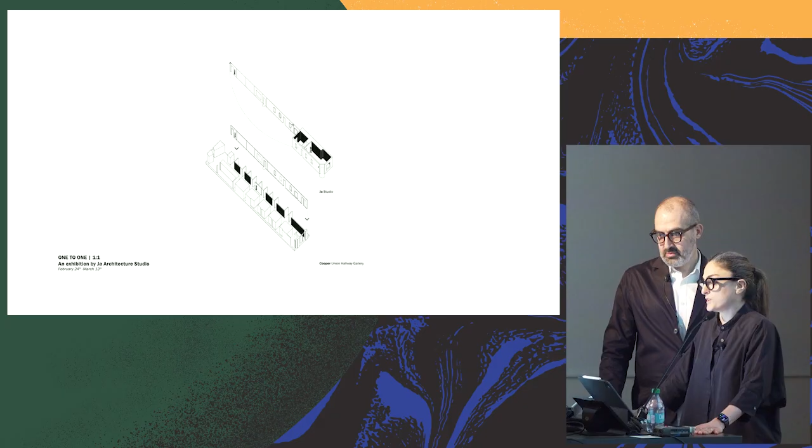Which is precisely why when the Cooper Union asked us to do an exhibition on the work of our practice in New York, we chose the space of our practice over the individual projects, and photographed the walls of our studio and overlaid them onto the walls of the corridor gallery there at the scale of 1:1. The exhibition was actually called 1:1 because we figured that the unrolled surfaces of our practice is exactly the same size as the gallery space at the Cooper Union.

One space in Toronto, Canada, the other at Cooper's Foundation Building in New York, which has a rich history. We placed 1:1 images on the walls, and then we brought in some of the objects from our office. Here you see the sawhorse that we designed, a construction drawing set, and a concrete piece that we designed for the Venice Biennale, all placed on the image as a scaled reference.

These transpositions happened on every surface of the space. In its best moments, there were conflations of not just the design objects and their images, but the adjacencies of everyday objects - like the fire alarm of one school and the thermostat of the other - which brought the day-to-day rituals of an architecture school and that of an architectural practice into a one-to-one relationship. And of course, windows and views and depth added an interesting dimension to the exhibition.

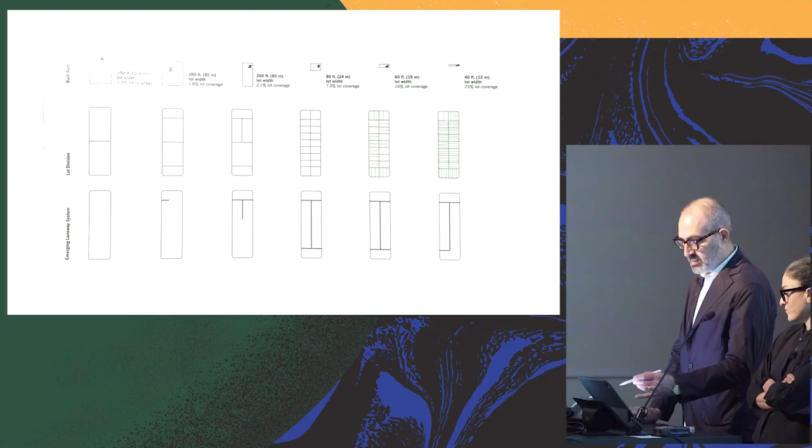The urban line is present in the city, and if you need to know one thing about Toronto, it's a very binary built form—either extremely low-rise or high-rise. That cap on height in the low-rise neighborhoods creates a very clear orientation of the blocks. You can see how successive subdivision has created a clear grain onto the context, with narrow and deep lots generated by that subdivision of elongated blocks in the city, coming from that cap.

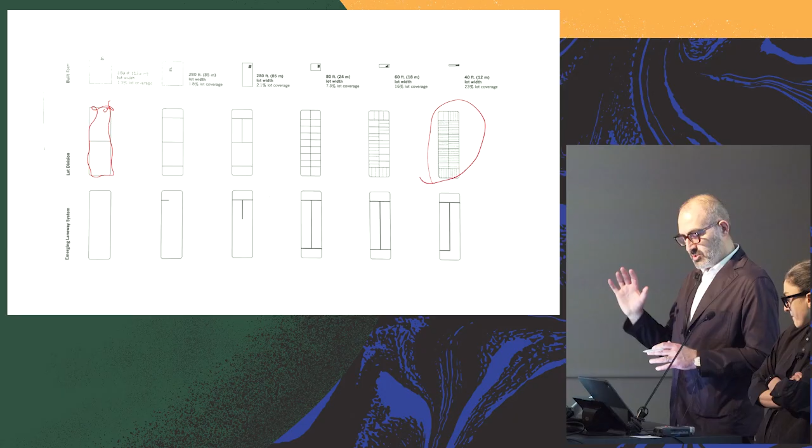Any residential project in the city deals with that condition. There's something beautiful about generic conditions in the city that keep repeating, and all projects deal with that—that's the lines of urbanism. There's also the anomalous relationship of the service roads or laneways—sometimes it's a T, sometimes an I—and all of those create unique conditions within a generic block. So within those two things, most of our work operates.

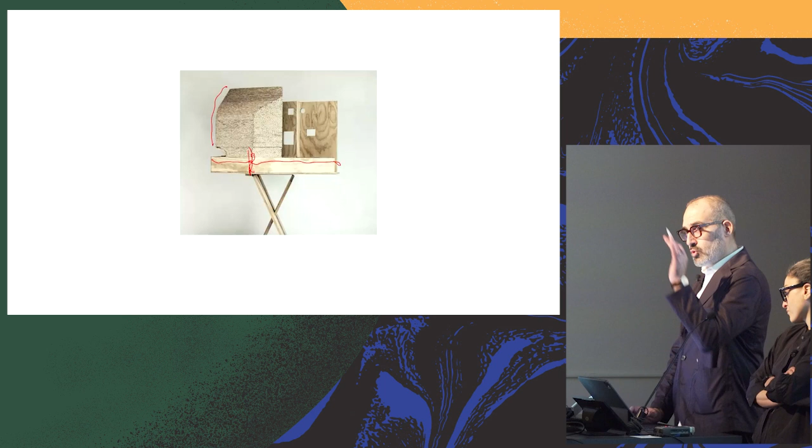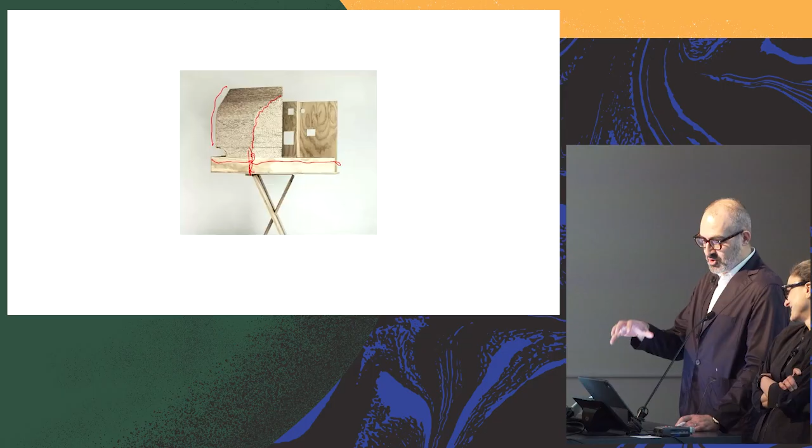If you think about the kink on the property line, which happens exactly at this moment, and the scooping of light, which is the generator of the section, you get this elegant intersecting line. We try to not only find that in geometry—and I'll explain when we get there—but to use it as a starting point that architecture deals with, getting more and more out of that kind of delicate relationship.

I would go through a few projects very quickly. This project is in the neighborhood.

This is our office, and this is the project that is right behind a commercial row, and there's a laneway there. It's a condition of a laneway and a series of turrets that we found on the corner of some of the Victorian houses, and we took the edge and connected it to one of those and put it in the back.

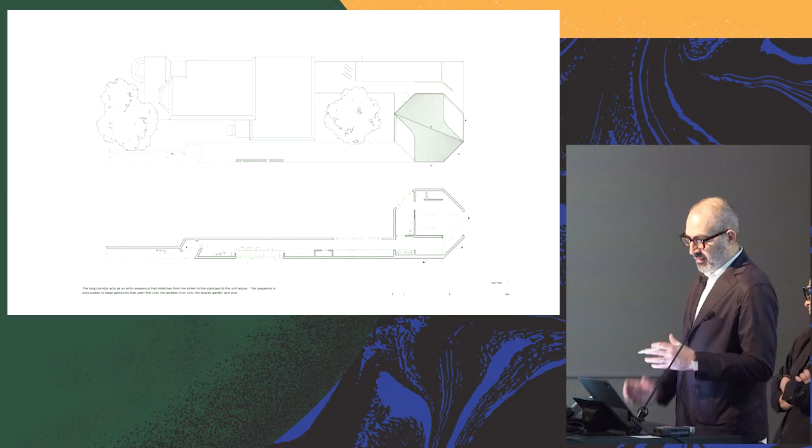So that typological element comes from this side, and then we tried to understand the house as a path. We thought it's an interesting theme, but also how you can fold that within it. There's something interesting about a set of stairs that does that, but also how you can inflate the property wall and produce a kind of thickness that is occupiable.

There is something about the laneways and the quality they have that belongs to the servicing side of things. And then your architecture finds itself at the end of it, including the edge.

That's the kinked property line, and that's a side addition. Let me look at it bigger. That's a side addition where we try to find a kind of tangential relationship, but still a threshold to go over and also pass under. So there's a crisscross that you don't expect to happen at the moment of the addition.

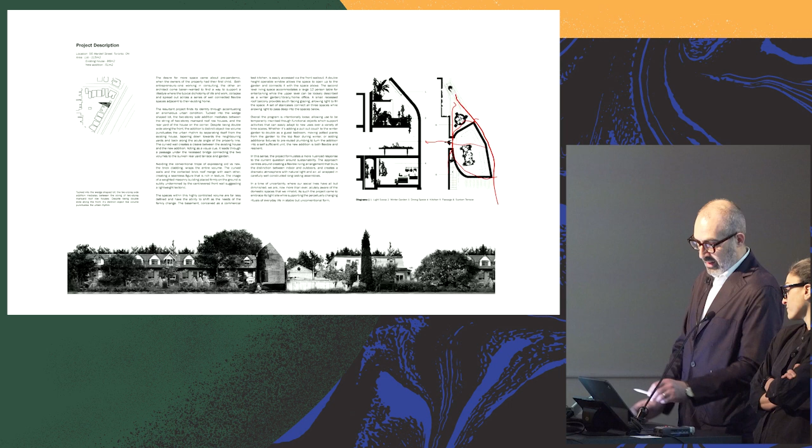At the same time, the side yard is a function of that moment in the urbanism of the lot division. We try to create an architectural promenade that goes under, gets here, and then takes this, and along that stair, it goes up. This is the front, as you can see, that's the passage, and that's the edge that I already showed.

In this view, you can see the whole thing happening. Within such a small footprint, you have the transition from the main building to that. You have the underside that you can come directly to the backyard, but at the same time, you see the presence of the stair that goes up at the edge.

Exactly at that kinked moment, it becomes a landing and it goes up to the point, basically to capture light, which is the bedroom on top, and that's the front.

This is a kind of multi-unit version of, not the same, but a different project, but you can see that theme happening. These were a series of units that we wanted to stack.

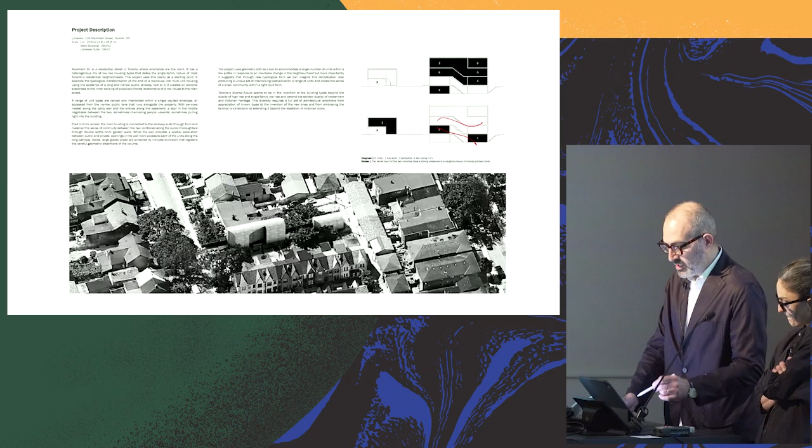We used the laneway on the edge, and we used a kind of crisscross or scissor stair, not just for access, but also to turn the units into a kind of interlocking, scissoring units that have ventilation on both sides, but also they're almost like a version of a townhouse because they're accessed from grade.

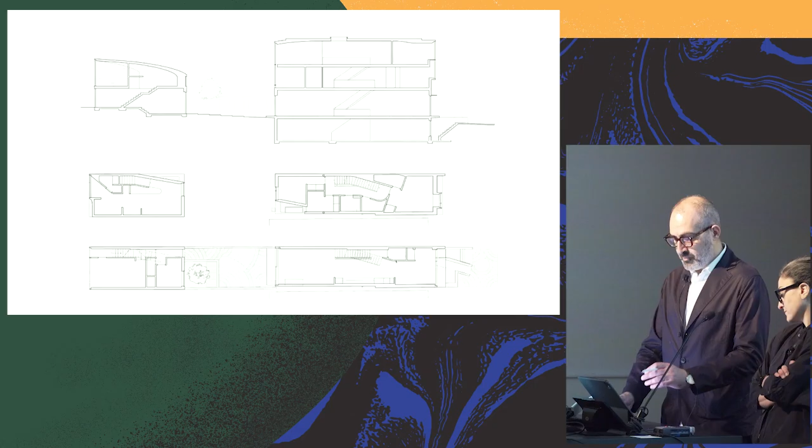This is a project that's more constrained. We try to create just a relationship between front and back through tilting or skewing the property lines, and create two geometric lines on the front that connect the side in the back and also the side of the ADU, the accessory dwelling unit.

That's the presence of it. These are extremely tight, packed projects in the city, and show how you can take an existing type. This next-door neighbor is also getting the type and doing their own thing, also referencing our project, but taking the type and transforming it through the means that are available.

You can see that oblique line registering the stair at the bottom. That's a threshold and the balcony it produces on the edge, and that line and its intersection becomes, on one side, the edge of the stair folding over itself, and sometimes it creates this kind of barrel vault with a fading line.

It's something. In the back, you can see again the presence of it becomes a full barrel vault, and also on the edge it's cut by the property line and produces a line. So that kind of relationship of registering a line, or doing something that has consequences in architecture across, is dealing with the existing type, which is of interest to us.

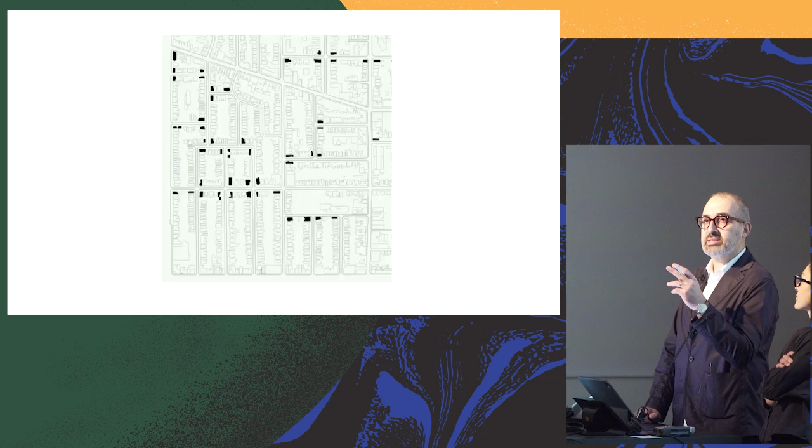Walking in the city, it's nice to see architecture in multiple episodes, and because we were doing these kind of small projects, we decided to basically commission all in one neighborhood, or most of the commissions we got started to be in one neighborhood, and the ones too far, we don't have a car. So it became a thing to just pick projects in our neighborhood, and we realized we can explore themes—every site is different, but you also have shared themes of interest that can go.

So this used to be a garage that we turned into a kind of bakery for an architecture graduate of our school, and these are the openings of the garage. Essentially, there is a barrel vault going inside that separates the front and back of the operative part of the bakery, and then we use the garage doors as an intersecting element for the front and back separation. So that is also very efficient. You enter from this side and you just go through, and you also see the operation in the back. This is the other view.

Another project that is a tight fit within an urban condition. It's an addition to the top, and this is a theme that keeps developing in our work—how can you maintain a kind of subtraction within the whole that sometimes acts as a patio like here, but gradually it becomes more and more charged with a threshold condition of inside and outside.

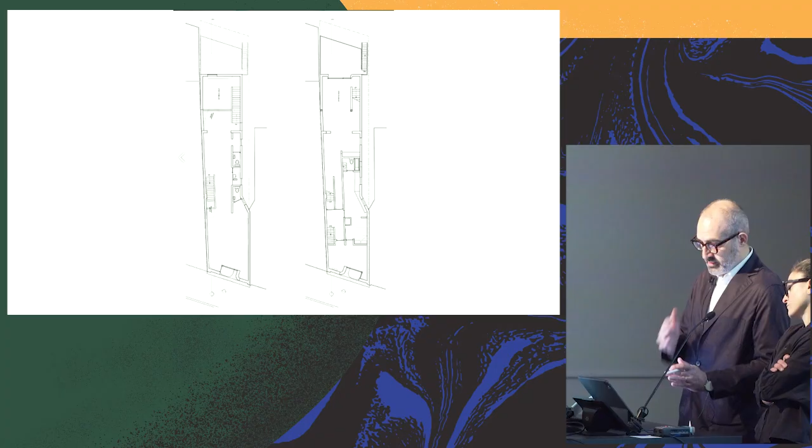This is a gallery on the ground, an artist residency on top, and a speakeasy in the back. So it's a packed, narrow project that has a very odd outline. This is a kind of old building, and as you can see, it's very deep and it's also skewed.

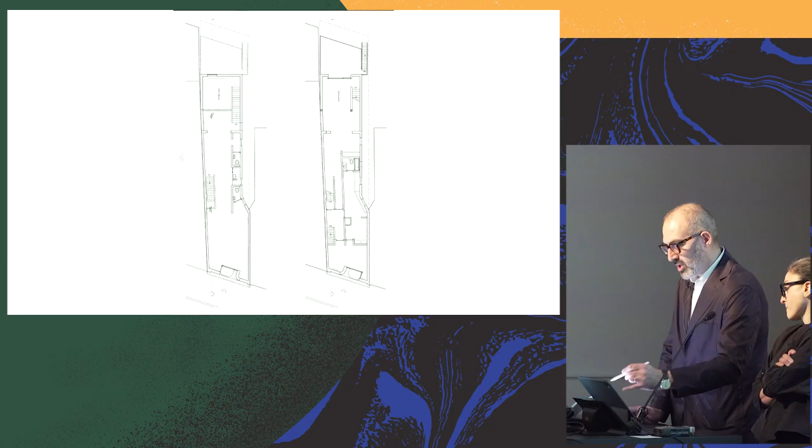So as part of bringing the lines of urbanism into the consciousness of the project—these are very simple, minimum-means projects—but when we get to the end, this is perpendicular to the street. So when you're on the street, you don't recognize the skew or the oblique of the project. We wanted to make sure that by the time you get to the end, you have that double consciousness of the relationship between the two lines.

So this is how you enter. You see the orientation of the skylight, and it's a big skylight for the size of the gallery that is in the back. And it also goes in—this is the second floor. You can access it from the third and the second, and you have that double height in the back.

This is a gallery and a hotel, again existing—this is a kind of retrofit, but we changed the front to create a subterranean condition right next to the sidewalk. We love the kind of urban threshold that has a subterranean relationship.

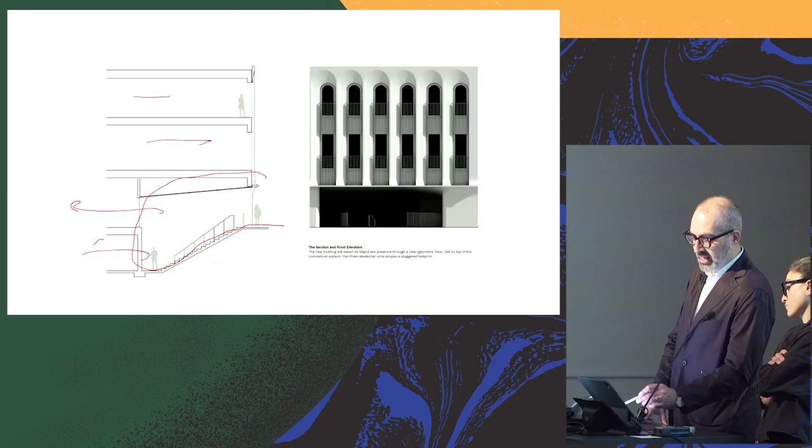It became a gallery here and a hotel on top, two gallery levels, and this is a kind of existing building where we changed completely the circulation, and we turned two nodes of access and service on the gallery side, with all of the subdivided small units on top.

This is that kind of glimpse of that threshold, and that's basically from the main level looking at how it goes down and up. It has a kind of cavernous quality.

The stairs change. Some of these projects we try to work with the constraints of a real project in the city. We also like the fact that we are building a lot in one neighborhood, and sometimes you have to basically like the idea of working with the constraints of how you build in the city and in the neighborhood.

This is the hotel level. This is the gallery level. It's just one giant space, and the curator of the gallery organized it as one series of one-shot spaces, and I think they did a great job.

And this is you. Okay, so...

Since the prompt is a line, in the same spirit as Nima, I will try to define line in landscape as a tool and a flexible threshold—a threshold that thickens and thins, disappears and reappears, that separates landscape from architecture, site from building, figure from ground, inside from out. I like this line by Diana Balmori a lot, because it is that line.

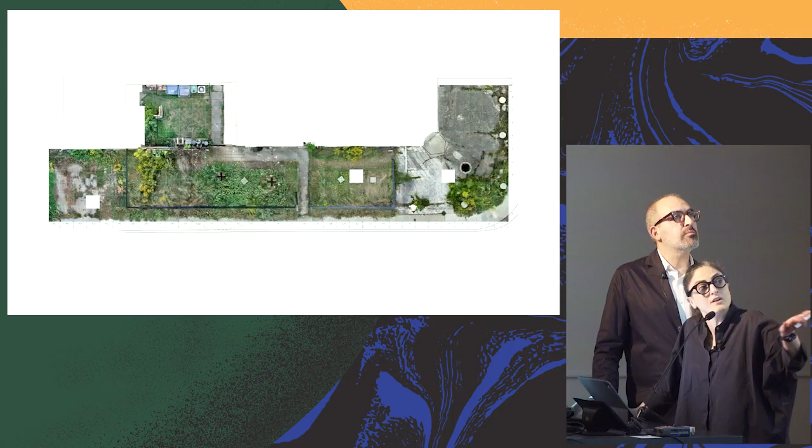Lines also represent thresholds or crossovers. Our office flankage yard is one such threshold. Flankage yards in Toronto are peculiar urban spaces protected by city bylaw and maintained by property owners, a vast number of interconnected yet fragmented network of ecology, where a change to the ecological makeup of one can impact that of an entire neighborhood.

And this doesn't look great, I know, but there is a method to our madness. We laid a grid system across our side yard using the quadrat technique to isolate standard units and study the number, type, and patterns of plant distribution across as a way of understanding its change over time, always preserving the plant and their chosen position with minor, mindful intervenings on our side.

300 squares were marked and systematically documented over the course of now 4 years. The species were collected, documented, and cataloged. These are mostly what we call spontaneous plants, and what our neighbors call weed. So our neighbors are not very happy with our little experiment here.

We study the temporal change and movement across our yard and its impact on the large and immediate neighborhood, which yielded an interesting shift in the ecological makeup of our surrounding, from manicured lawns to now mostly wild meadows, which, as we all know, encourages pollination and promotes biodiversity.

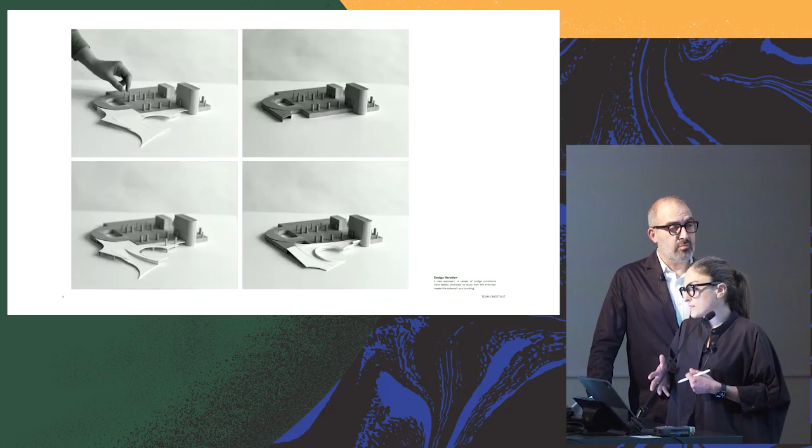The entrance of the building becomes the moment of convergence of different flows: flows of ecology, water, and wildlife below, and flows of human vehicles above, where a light tectonic bridge lifts and spans over a sculpted landscape, creating room for water and ecology below.

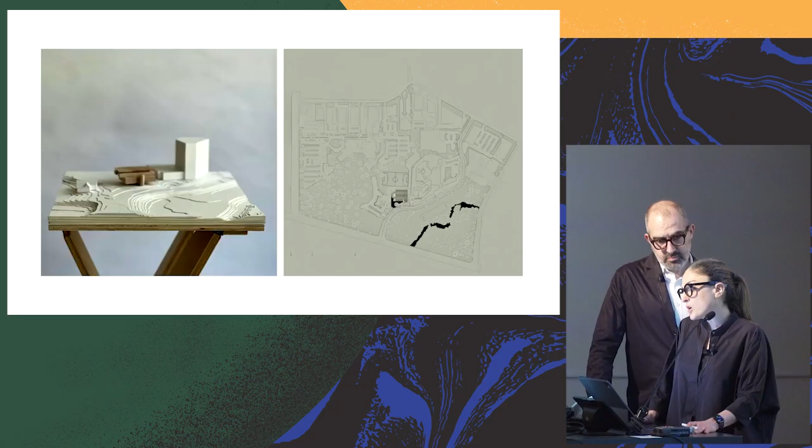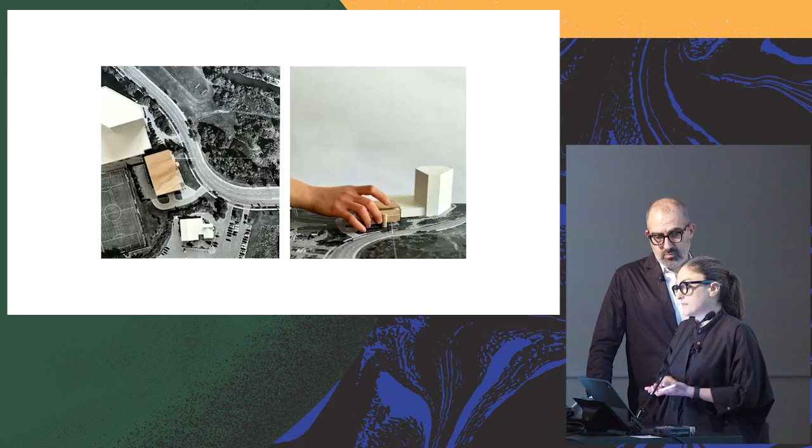The site is on part of Don's watershed. Don is one of Toronto's two ravine systems, Humber and Don, which bookend downtown Toronto. Here and here, this is Don, which makes our project similar to our Sard Yard—its importance is much bigger than its footprint, because what we do here will impact the ecological makeup of Don and vice versa. So the proximity to Don and the rich indigenous history of this land made it only fitting that the ground becomes the protagonist of our project.

The project began with the removal of the existing driveway, replacing it with a permeable and sculpted bridge that spans across the meadow and provides access to the building. These were some of the preliminary studies we did at this point, studying patterns of ecology, permeability and impermeability, mostly two-dimensional. Then we delaminated, or lifted, the bridge and the driveway, turning it into a bridge and starting to sculpt the ground, which gave the project a third dimension.

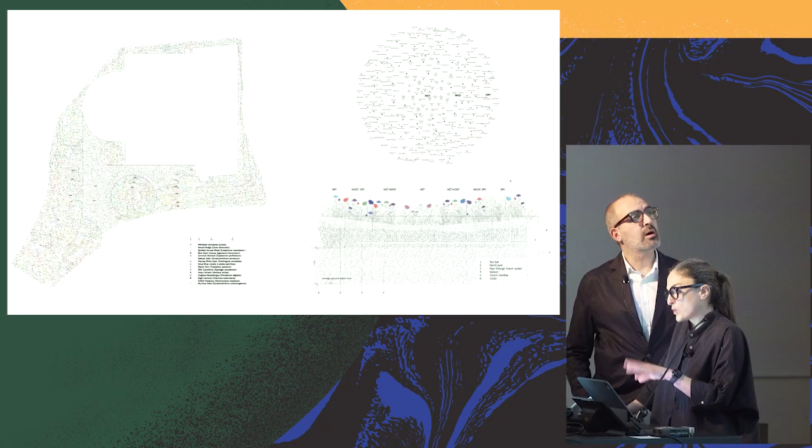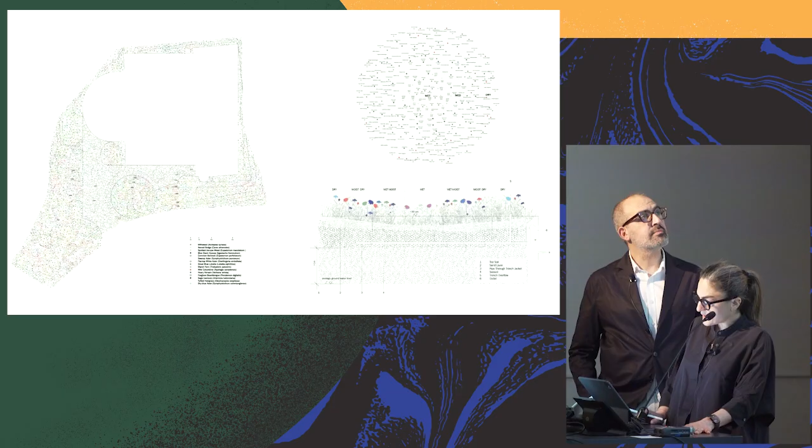The ground became a series of sculpted bioretention ponds, or cells, circular in plan and more organic in section, with accentuated ridges that offered a level of definition to the groundwork and also helped contain water on the site. Each pond had three distinct moisture levels: wet, medium, and dry. Each zone is planted with a combination of low-maintenance native perennials and grass, creating a wild meadow registered precisely to the anticipated degree of wetness of each bioretention cell.

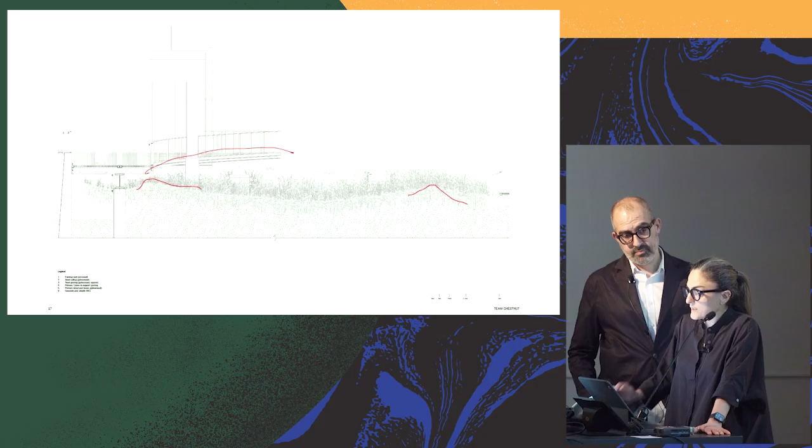The bridge subtly lifts and registers the pedestrian and vehicular access over this sculpted land. In this section, you can clearly see the geometry of one of the cells, with accentuated edges, and then the bridge hovering over the landscape. We draw the landscape with the same level of precision that we draw the bridge.

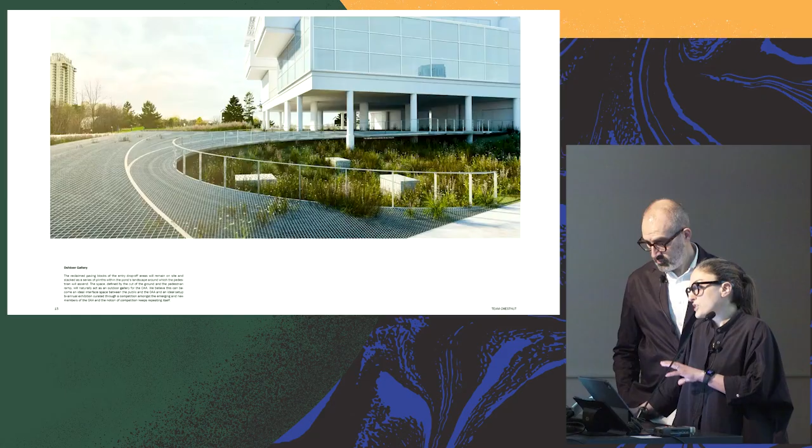This lift registers pedestrian access. We use grating as the material to reduce impermeability and allow light and water to go down below to the meadow, and its geometry and relationship to the ground leaves room for the meadow to grow beneath and sometimes protrude from between—which later on the client absolutely hated, for accessibility reasons.

Yes, so if the first part was about line, the second part I'll be talking about is party walls, or generally seams in architecture. Those of us who teach know there's a relationship between what we teach and the projects we do in our offices—sometimes after a while you find they feed both ways. It's never from one to the other.

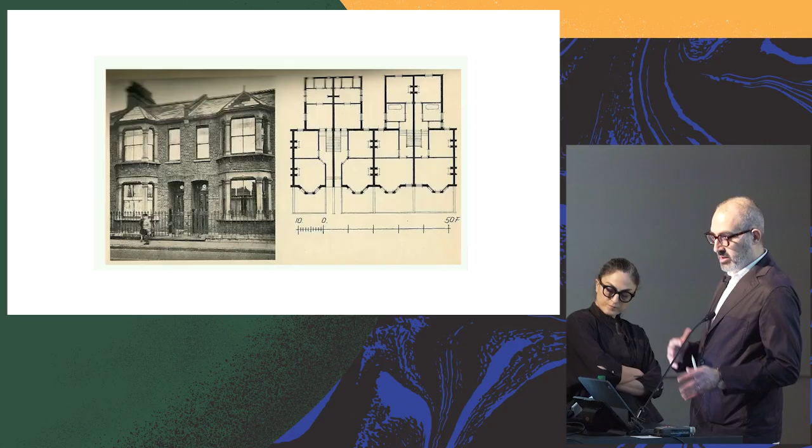The site of the project was in Toronto, but this is a London townhouse. You can see how an idea and a set of agreements goes from one context to another, and that's the history of typology—both charged and problematic, but also interesting. That is less about the authorship of a single project.

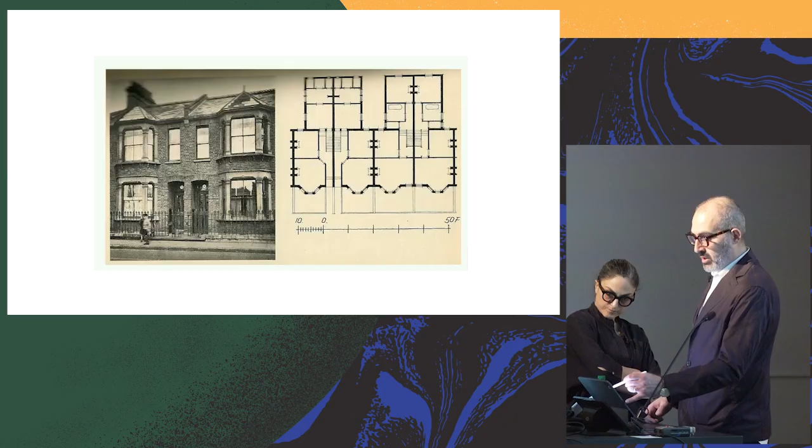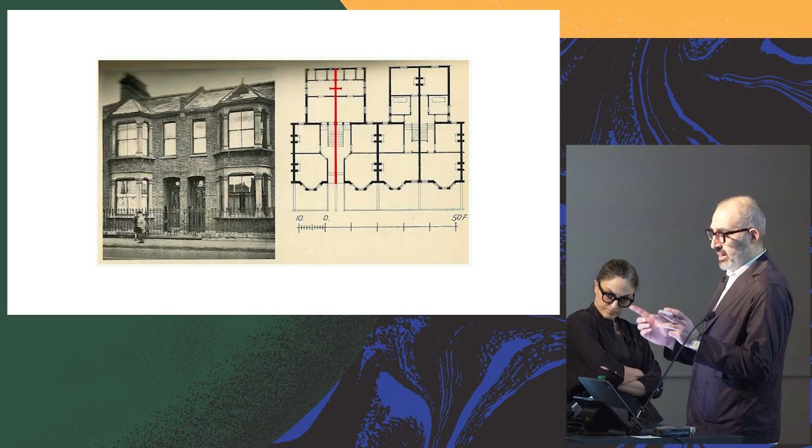And also in the simple act of just creating four rooms back to back and directly accessed from the street, that idea of packing is charged because each of the two adjacent houses share a party wall. A party wall is exactly on that moment of division of a lot, where two adjacent neighbors share a wall. They share the ownership, but the wall is also structurally dealing with both of the spanning of the two houses. So there is something charged and interesting about party walls.

The prompt of the studio was how to change the shared elements in a set of townhouses from an object to a space. So the idea was we gave a series of townhouses from different cities to the students and asked them to pick a room. It's a kind of warm-up exercise, but it became very productive in the whole housing project.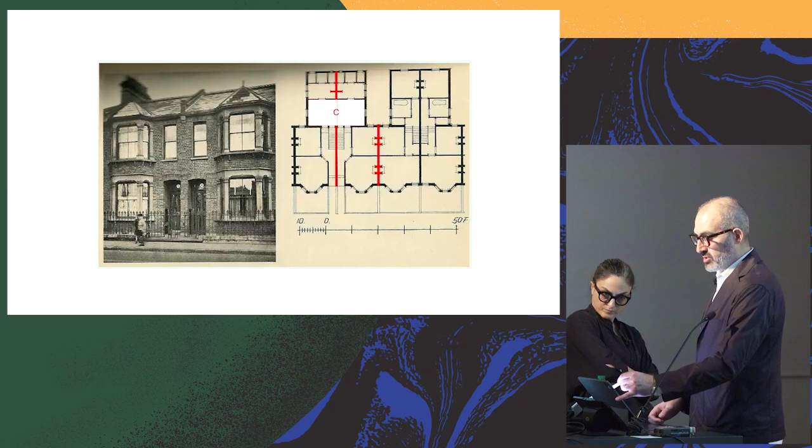You take two rooms, however you want to pick them. It can be side by side, and the moment you remove the party wall, there's a structural element of spanning, but there's also a shared new room condition that is produced. If it's at the end, there's a question of what happens to the original operation of the type, because you have to go through a shared space to get to the end of your unit.

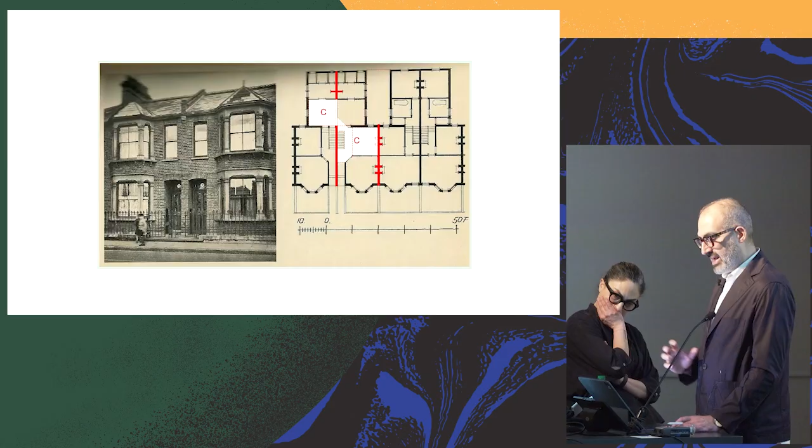The sequence, the relationship of that to the rituals of domesticity was interesting. If you pick the rooms, things become more complicated, or interestingly complicated, when for example you pick the rooms across the corridor and create the shared space. Then suddenly the symmetry is broken, and the stair has to also accommodate this new condition, this crisscross. So a lot of ingredients in architecture start to get implicated.

As part of this, this is something you may agree on: good assignments for studios are less about your own work. They have to be generic, meaningful and broad, and they're great if they're simple. So it starts simple, and gradually students would think about configurations within the adjacent houses, how a notion of sharing can be created within.

For GSD it was more about hybridizing the two. Think about this example I just picked out, the project on the right. It's by a London firm, Pike Al-Jawad, and it looks like a project that we could have done, or should have done. And I thought, okay, what would be the logic of creating a hybrid between the two?

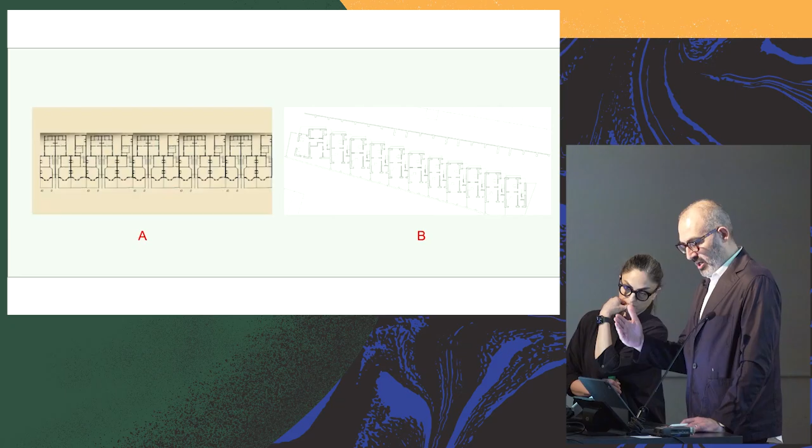This was just a diagram. A and B are two bars, but B has a kind of oblique aggregating logic present in the way things are staggered and aggregated. So how can you think about the scene now in this condition?

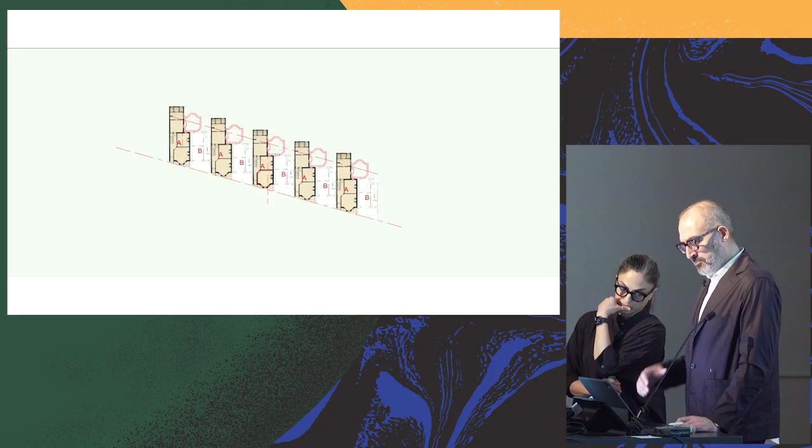If you alternate them and pair them, you create a whole. This time the whole has traits of both of these projects, and if you take the room of one and put it in the setback of the back, suddenly you have a notion of shared space created that is exchanged between the two, and it's more spatial. That's the starting exercise of the GSD studio, and it's about how we can share.

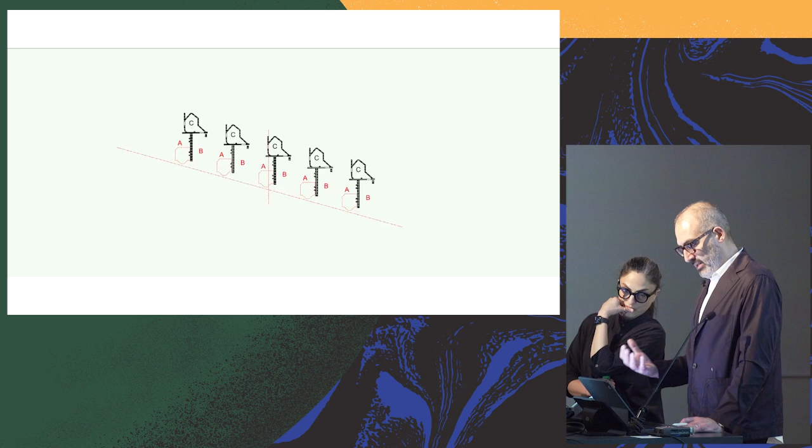I think that theme in housing is very profound and very important, but the technique of it is something that architecture can really get into—one of those themes we can dive into, learn more, and establish the nuances within that range.

I would go through one project of our office. We call it Parti Wall, but essentially it's a party wall between two adjacent row houses that share it, except the one in the middle is trapped in the middle. The one on the side has access to a laneway, or the presence of a laneway or service road on the side. The idea was pairing of two stairs.

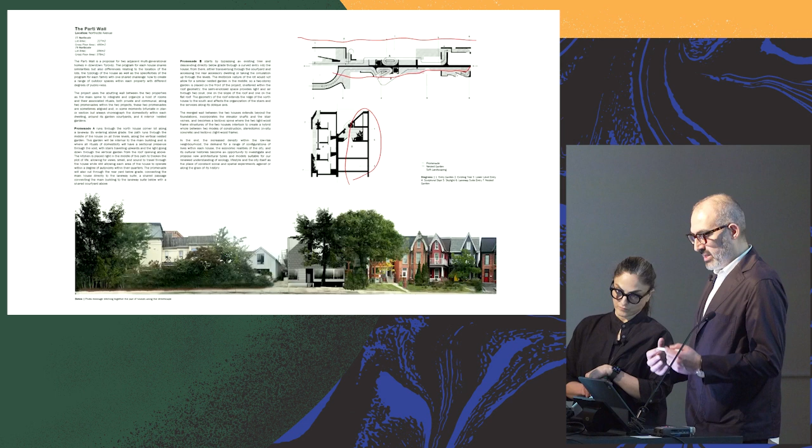These are the two stairs with two kinds of gardens that later on we talk about, a theme within the building. By the way, today the best moment was when Ashley took us to the end of the ramp and we saw the garden, and when you mentioned that it's a garden, not a green roof—that was the best moment.

So it's a theme that is becoming present in our work, and this was a pairing of a stair. But also, because it was a multi-generational house and the ADUs and laneways were already given, we thought it's good that for each building there's also a kind of nested outdoor space within the building. Except this one cannot have that kind of access to light, so that typological difference would push the garden to come to the front.

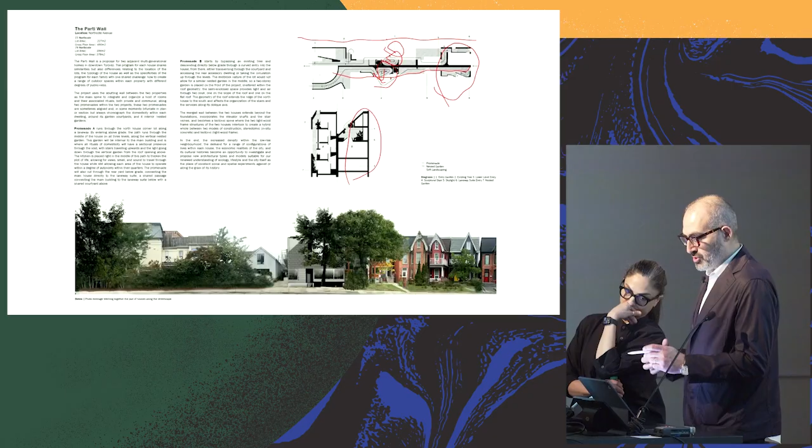So this is on the front for this house, and the other one is already in the middle. In section, this is the garden on the front, this is the garden in the middle—that's the condition I was trying to explain. This one is in the middle and has the access, this one uses the front. That's the elevation, and you can see the opening to that.

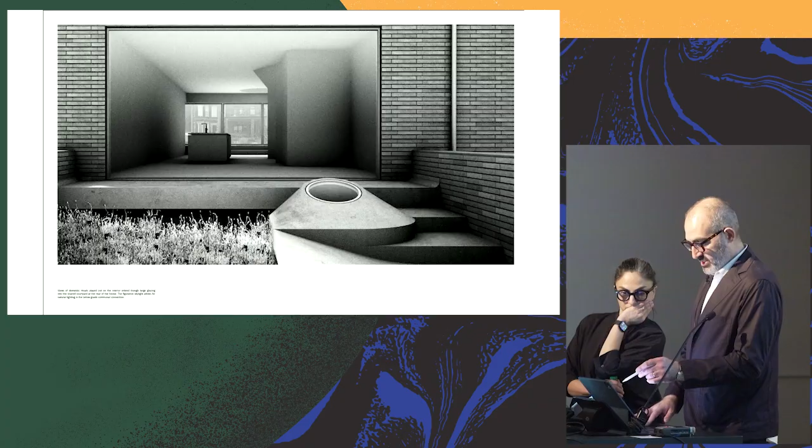It's a bit contained, so it's a condition of a double where the entries are also different. One goes to the bottom—there's a kind of threshold to the basement, so it's subterranean, with the living space above. The other goes directly to the living space. This was the condition of getting from the underground to the lane, to the ADU.

Half of it is built—this half is essentially this, and we're also finishing the interior. This is kind of fabricated outside, and we deal with one of the themes of building some of these projects: gradually you understand, appreciate, and learn more about the North American construction method, the light wood frame construction.

And this is that garden on the third level. There's a piece of plywood up there—when they remove it, it's going to be much more bright. It's a great moment for a garden that is nested within the shell.

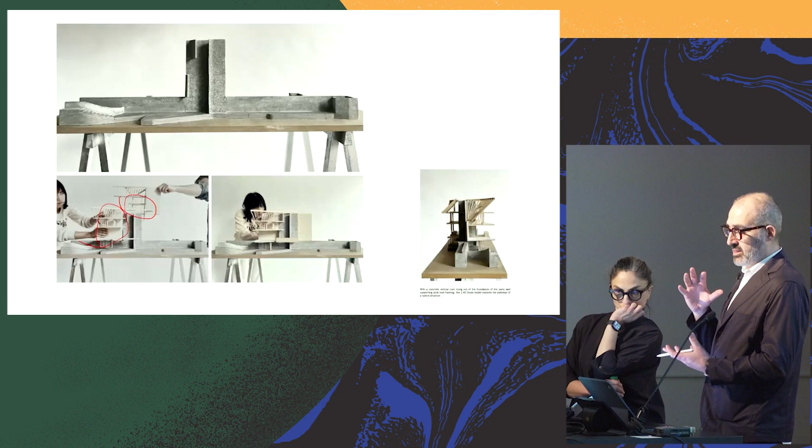The idea of tectonic, the kind of hybrid tectonic of two building systems, is very present even in the most normative houses in North America, because the ground is handled generally by foundation walls made of stereotomic systems—CMUs or concrete. We try to extend it within the core of the building upward and create more interlock. So the thing we've been doing in this project is think about the interlocking relationship between the wood components and the concrete.

That's a theme we've been getting more and more interested in. We had a proposal for Venice Biennale that was a finalist twice—it never got to the end, but it's again about the relationship between the heftiness of the ground and the lightness of the box above. We call it 'boring lightness' because it was boring in a sense, but also about the act of boring, or taking out a cylindrical extract of something.

And this is Behnaz showing—we built a few of them, at a 1/4 inch scale. And there was something about the lightness.

It's one of those things that when you come to North America, you start walking in buildings that slightly move, and that's an experience that's quite interesting. We think the lightness in North American architecture can become more expressive, more into the consciousness of the discipline. That was one theme.

But the funny thing is, as you go through mass timber now, you realize those kinds of relationships are still present in a lot of the buildings getting built in Europe. With mass timber, there are linear members, aggregations of linear members, and they still have that relationship between the stereotomic or concrete base—which also becomes the core—and the kind of basketry of wood that sits on top.

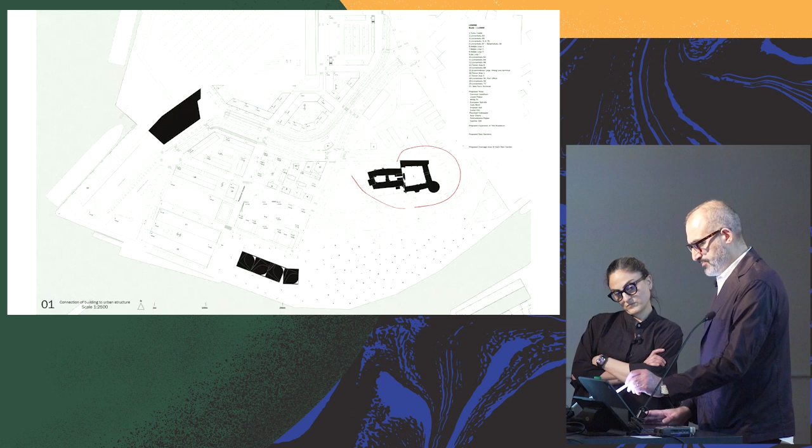It's in Turku, the second city in Finland, and we selected this because it goes back to the idea of a shared threshold and how aggregations can sometimes create a whole range of conditions through simple operations. We took the shed typology of what used to be an industrial port, and the site required us to address a few key buildings, one being Turku Castle. We took that typology, created one, then rotated and copied it, creating four different conditions.

This is a kind of coplanar moment between a roof surface that meets the complete planar moment—we registered that. As you can see, the rotation creates different conditions, but at the same time, on the other side, all of the clerestories—certain things in the act of rotation do not operate. So what remains constant and what remains rotated—thinking about simple operations with profound relationships or impact in architecture—is interesting.

We also try to create a kind of opening in the ground through the act of aggregation. Things can become structural, so you can have deep beams that are kind of structural and can sit on the ledge of a beam. And then you can clear the grounds from presence.

This is the ground that is occupied. There is also the presence of more and more we are trying to deal with a kind of ground that is extremely flush, and also deals with the question of water in the methods that Behnaz has already explained, and also becomes these kinds of moments of entry, with more public functions at grade.

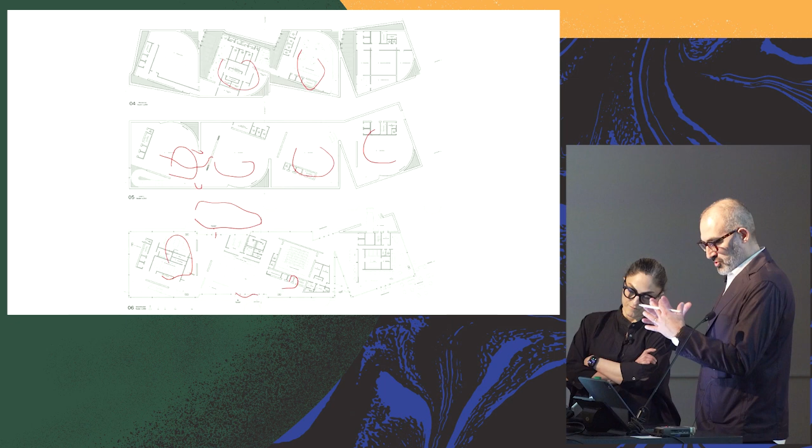But as you go to the top, you see the presence of galleries that are kind of contained, but at the same time you get these notions of seamless thresholds from one to the other, and the administrative part towards the end as the building kind of shrinks on the top. So the theme of type, the transformation of types, and the range of spaces you can produce was interesting.

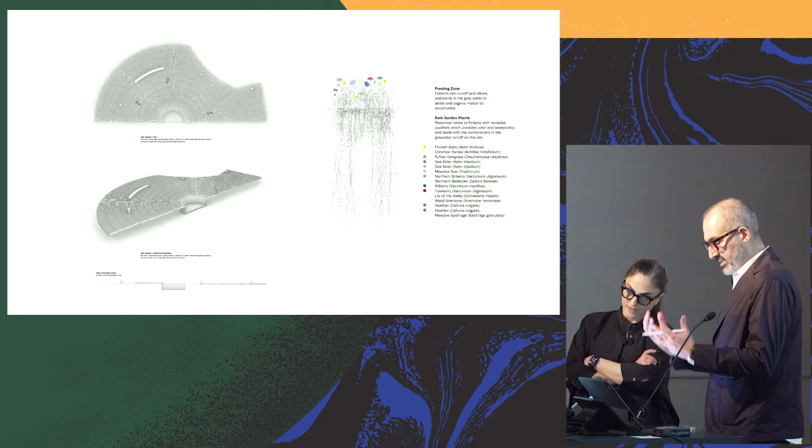And also the tectonic part that we are carrying forward that interest. This is the ground -- those are the retention ponds that Behnaz mentioned, and how we're always trying to create a kind of seamless connection that you can walk, dealing with the problem of water that is right on that edge.

So that kind of continuity at grade, the presence of the building, and also the conditions of all of these four seams -- it has some of the themes about the core qualities of that first object that I showed you.

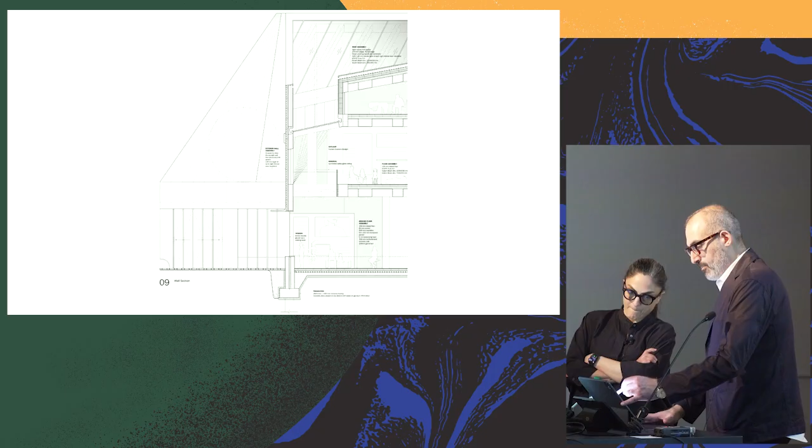The section shows, even within the section, how you can capture light for the side that goes to the front, and how you can have 1.5 stories with the galleries looking down, and also the attic space that would be allocated to more of the kind of administrative elements.

This is another kind of aggregation -- a project for Bauhaus. It was a 2-stage competition, 800 entries in the first round. In the second round, we got the 4th prize. We still like it because, again, some of those themes are present here.

I would say this is a building on the park, and it's also interesting -- the fact that Gropius's Bauhaus is in Dessau, and this building is also in Dessau. But the site of the competition is not within the school campus; it's actually in the city.

There is something about the role of how projects now more and more are looking towards the historic part of the city as the hub.

So even in the south, the museum is actually next to some of these older buildings, and we wanted to have a nod to both of them.

So the logic of the project is the kind of pinwheeling -- if you know the famous plan of Bauhaus, but it's kind of a 6 reciprocal pinwheeling that is happening. But the moments create one big room on the top that can be curated.

There's also these qualities that we like -- again, the double read or the ambiguous relationship. You would read this wall as the end of one, but at the same time, when you come to this seam, it belongs to the volume below. So there is a kind of overlap between the two, and it also becomes moments of entry and threshold.

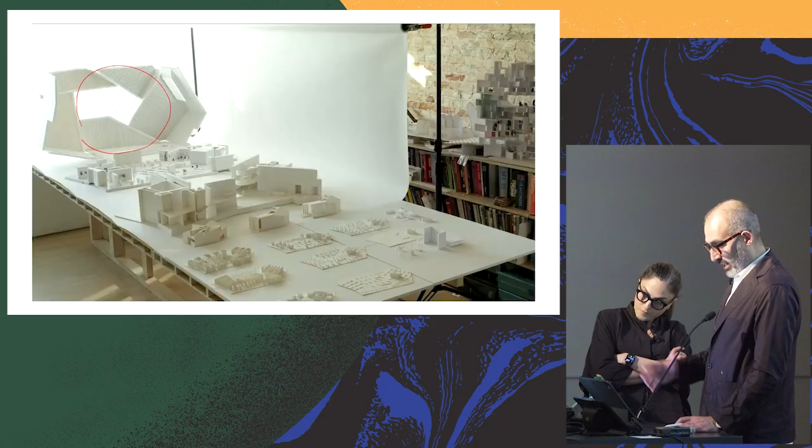And that is present -- this is the reciprocal beams that you can see. We built a lot of these models and were going full on for the thing. We got the 4th prize, but we love that table.

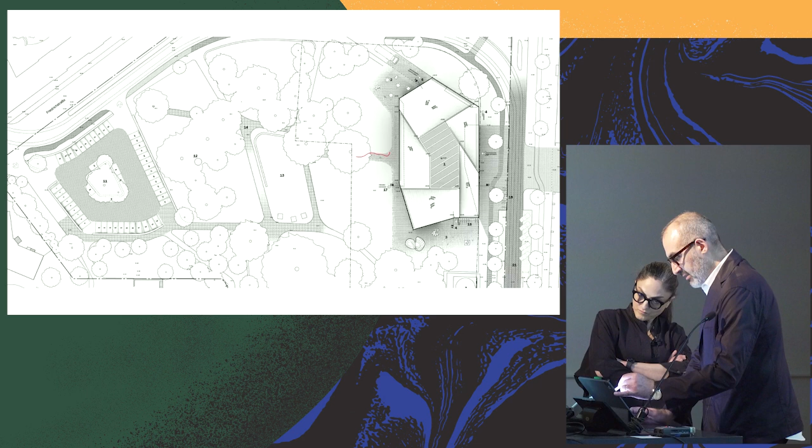This is the plan. You would see, again, those kinds of shared walls between the aggregation, and also the gap that I explained in the volume that registers essentially becomes critical moments for capturing light, but also passage. And again, Behnaz creating the kind of lovely relationship between the building and the landscape.

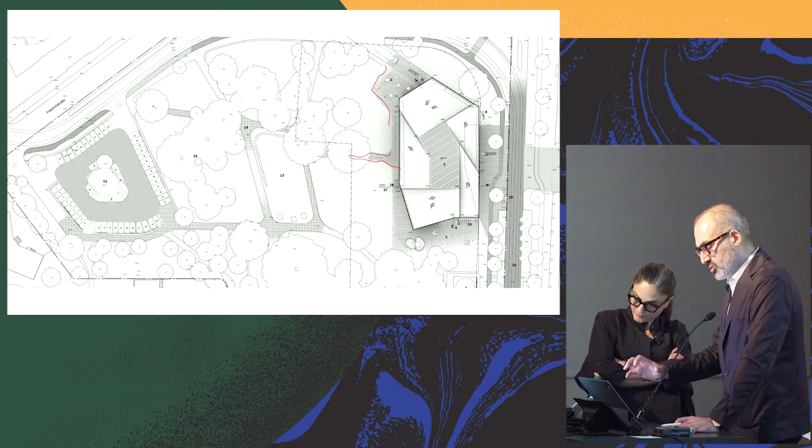That's the room that we created on top as one big space that is articulated spatially, but at the same time allows for larger curations. This is another project in Tartu.

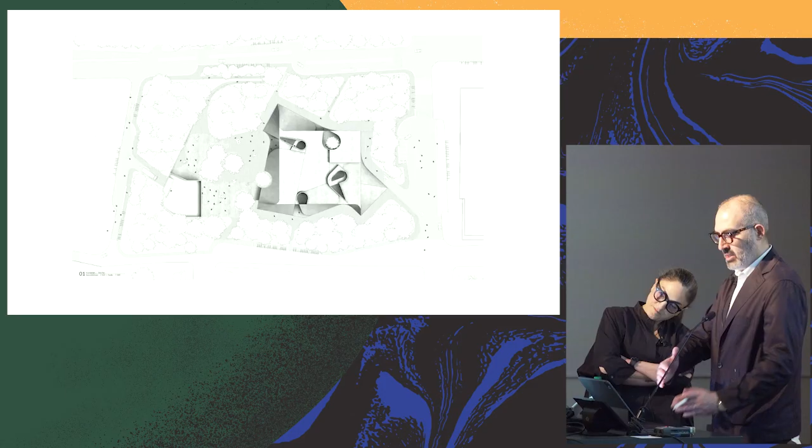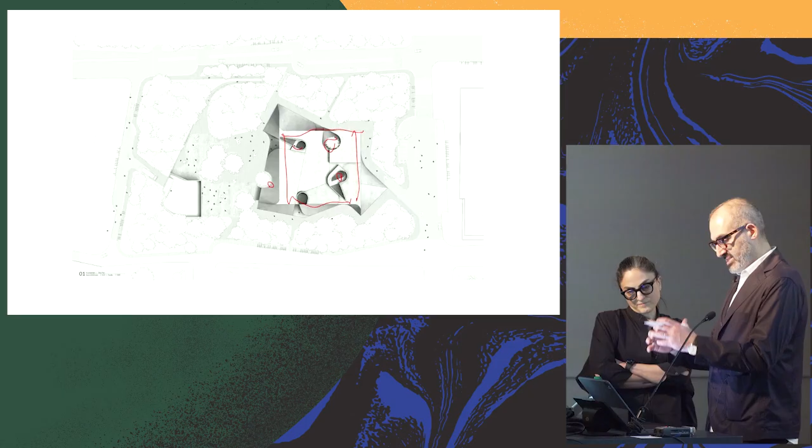This didn't win anything, but it was the idea of again thinking about mass timber coming from our learning in North American construction methods. The idea here is more about how you can think about rotating elements out from a pure rigid rectangle or square in the middle. That allows strategically for the placement of some existing trees to the side, but at the same time creates an overlap that becomes points of entry and essentially voids. So how can you think about the rotated overlap as a void? That can become a kind of rain garden.

It can also preserve certain moments - we strategically picked those to relate to some of the trees remaining in the middle of the park, but also tried to overlay it with both entry and circulation.

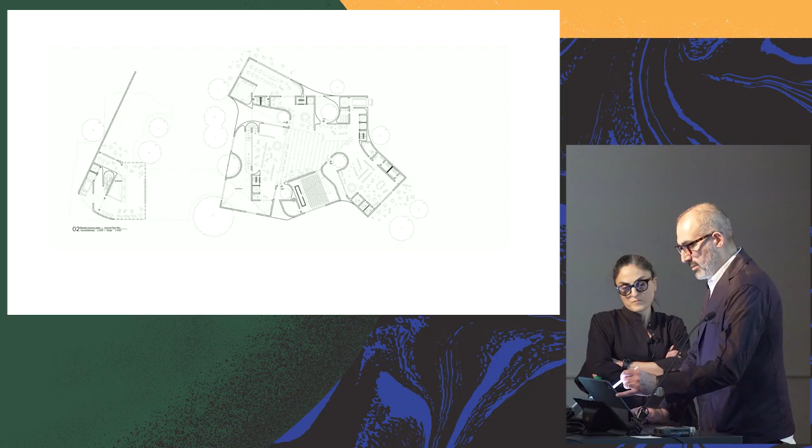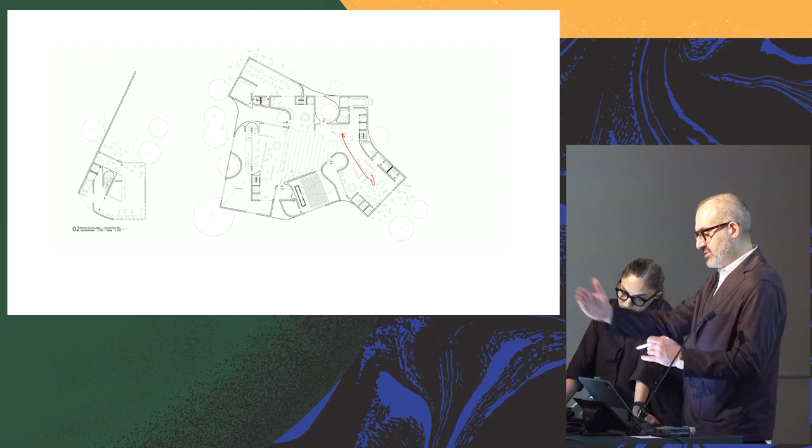Maybe that's why there were too many things happening on the same note. But also there's a relationship of reading and not reading the purity of the square - the threshold, the transition from one space to another, and the definition of a room. You don't know if you're dealing with one large collective space or a series of connected but slightly more defined and separated spaces. Those are the kinds of spaces, and that's the project on the ground.

It was a very massive program, and we had to connect a performance hall, or a small performance hall, from the base to the museum and the library, and also the parking structure on the side.

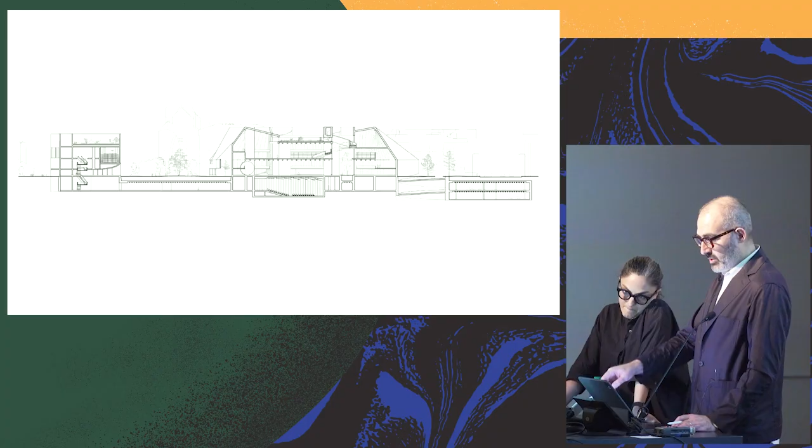This is the project in context. We really worked to create a big building that sits on the site almost effortlessly, with these points of entry. And that's the presence of the project onto the park.

We wanted to have connection to the park, but we wanted to make sure that the entries remain deep into those critical moments between the volumes. It's not an aggregation of just a series of volumes - when it gets to the center, it becomes one. So these are the kind of themes that we are interested in.

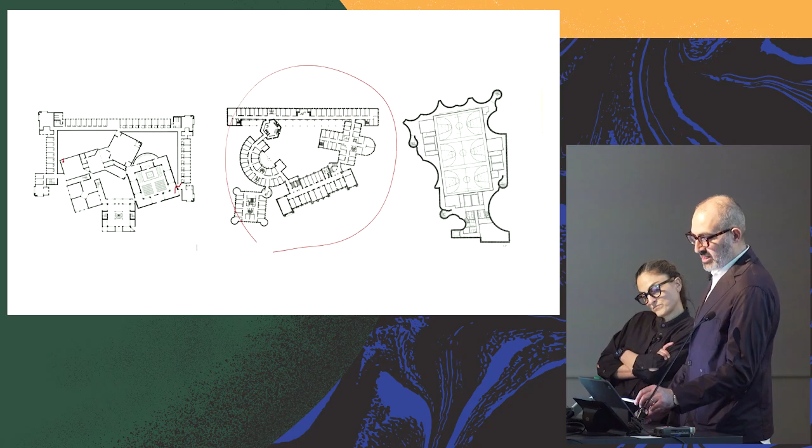We always look at precedents in history. If you think about the different versions of this act of aggregation, there's a level between the Stirling version and the Kahn version - I'm trying to remember, the mother house, what was Kahn's Dominican mother house. This famous Kahn project shows point connection and the framing in the back versus the legibility of typological elements being aggregated, still with point connection as a transition from one to the other.

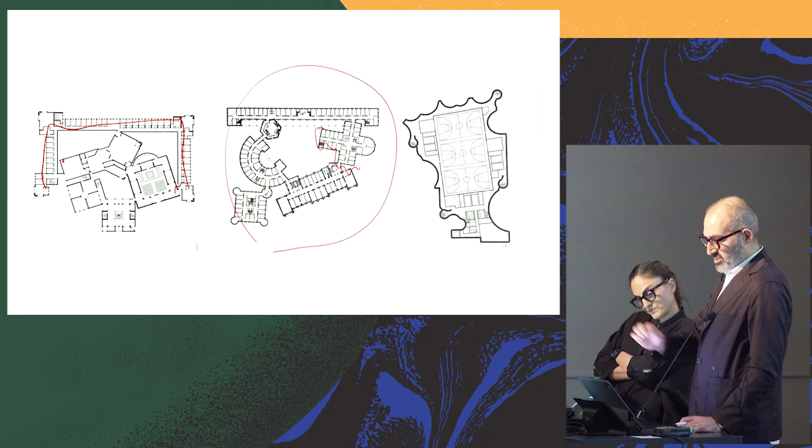Versus the Kerez project, a gymnasium that basically subtracted all of the tree roots and created one big space correlated on the edge. So we always relate our mode of work to some of those historical precedents to always situate ourselves.

And now that's your turn.

So yes, as you saw, particularly in the last one, we're kind of trying to move these thresholds inwards in the projects. And recently it's become more and more, I would say, where there's more interaction between the insulated and predictable built form and the unpredictable and messy ecological systems.

Which I guess began with a cross-disciplinary options studio I taught first at the University of Toronto, and now currently teach at Cooper Union, called Plant Diaspora, where the term diaspora, typically used for humans, refers to plants displaced or relocated from their original habitat. The studio was a way of exploring topics in architectural tectonics, ecology, climate change, immigration, displacement, and more, using greenhouses, or more specifically what we call Wardian rooms - a riff on the Wardian case, which was used to transport plants during colonial expansion, as a vehicle for our explorations.

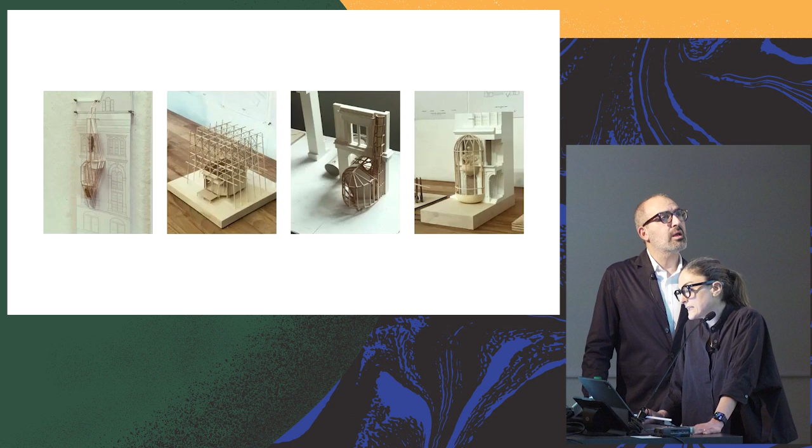These are some of the models that my students at Cooper built, resulting in spatial, tectonic, and climatically charged explorations at the size of a room, in both cases - Daniels and Cooper - in relation to the respective school. Here is One Spadina at Daniels, and this one is the Foundation Building at Cooper.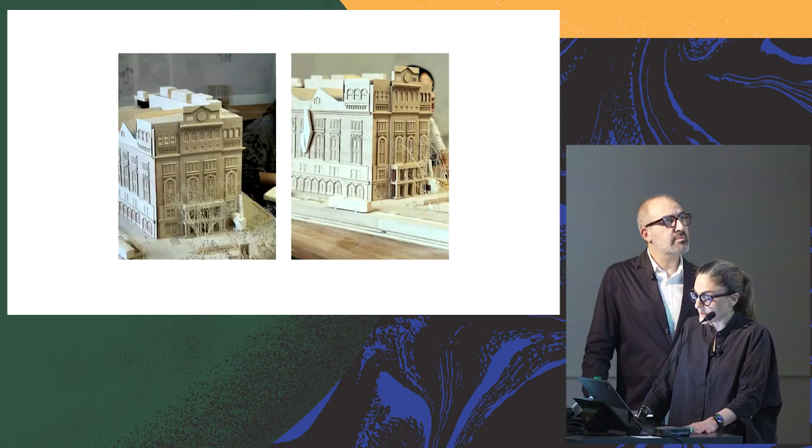These rooms are perfect crossovers between architecture and landscape, where as much emphasis has been placed on ecological precision as on tectonic resolution.

This was a contractable room for Siroma, an endangered plant from Korea, designed and assembled during the review. The design was a lean-to greenhouse taking cues from the neo-Gothic architecture of the school, both in overall geometry and functionality of details, such as the hinge, which through its expansion along that curved line and locking it in place creates potential for it to be transported as a narrower thing, and also expands for a human to crawl in and maintain the plants.

The play on that flexible threshold - and this is the last project we're going to show you, I promise - moving this line inward informed our most recent entry for a new Museum of Architecture and Design in Helsinki, Finland: The Light Stack. This is the same site as the Guggenheim Helsinki competition we entered way back, the largest international competition, with 1,700 entries. We got an honorable mention there, and we were invited to do this one.

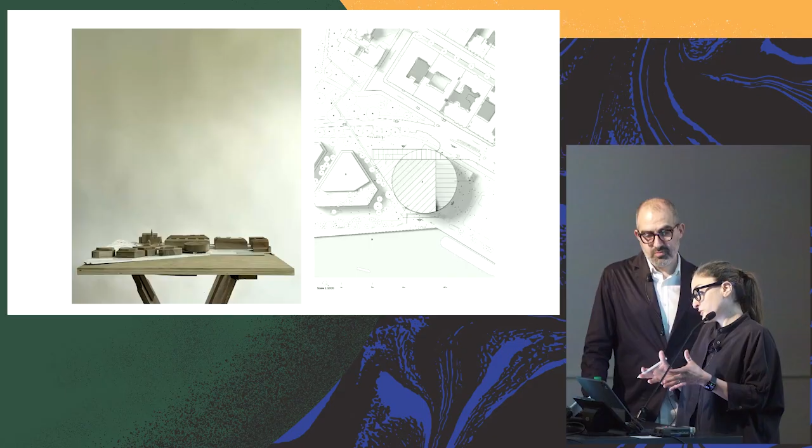The project was a unique urban site where multiple flows of urbanity and ecology converge - in many ways another ecological threshold created by the proximity of a hill and the water's edge, South Harbor, in front. This is a historical park, with I think a palace inside of it.

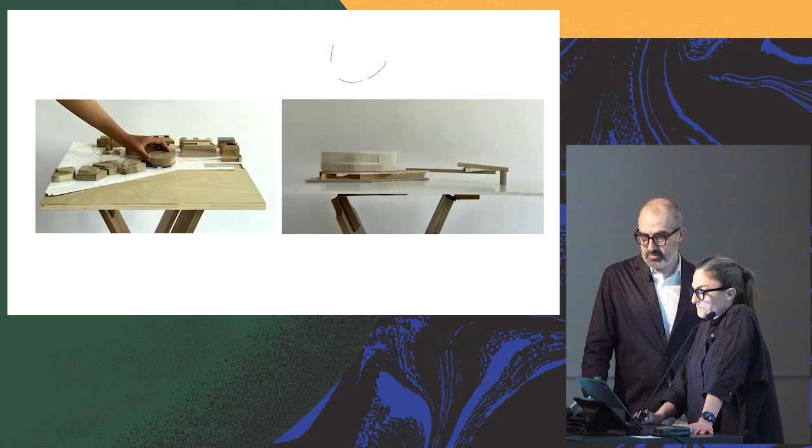And our response: a simple stacking gesture of a pure cylinder placed on a low multifaceted base, as both a formal and a performative strategy. Architecture at its moment of intersection with the site informs flows of ecology and people.

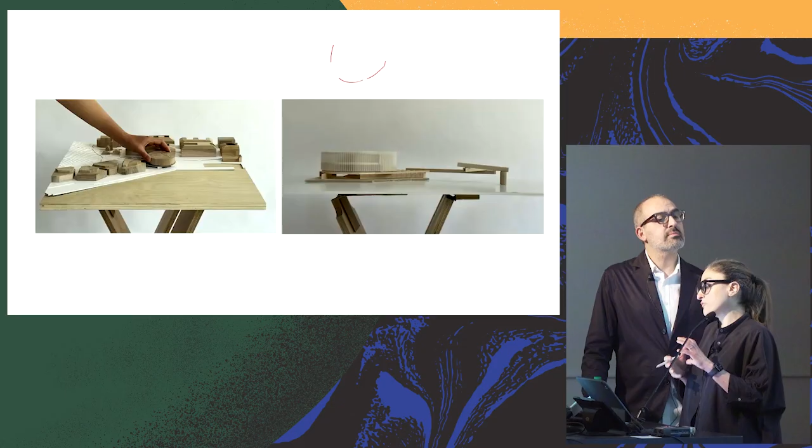The base operates urbanistically and channels all of the site's flows and movements into the museum, sometimes ending in the exhibition and sometimes as a passage connecting different parts of the city. We also proposed a pedestrian bridge in the back that connects the museum to the park behind.

The base was the maximum allowable footprint, and on top, that cylinder shrinks and separates itself from the row of developments in the district, playing a double role of urban conformity at the street level and iconographic singularity at the cityscape above.

Here is a model of the project again in wood - the project and the pedestrian bridge over here - and there are, as I'll talk about a little bit later, greenhouses within.

Programmatically, the museum tries to open the contemporary museum typology from the duality of accessible public functions and black box exhibition to a more nuanced concept of the museum as a series of interconnected rooms with different degrees of climatic separation, from enclosed galleries to semi-enclosed spaces to interior greenhouses.

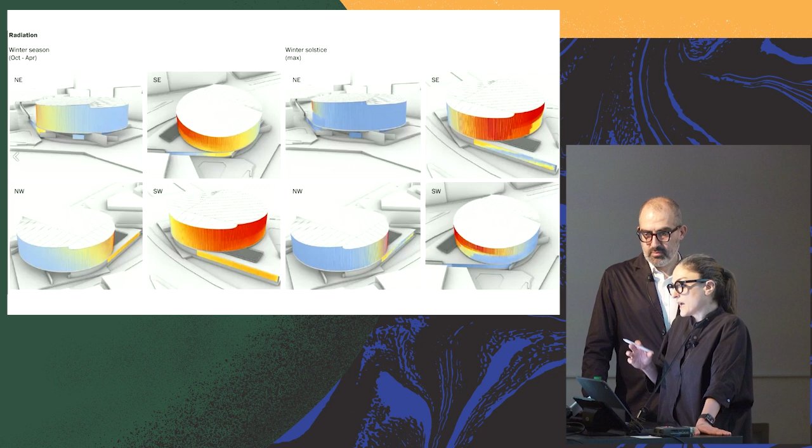We worked with Transsolar in New York to really push this idea of a museum with different degrees of climate separation, which came down to detailed studies to optimize the performance of the building's overall massing and the location and scale of the two greenhouses inside.

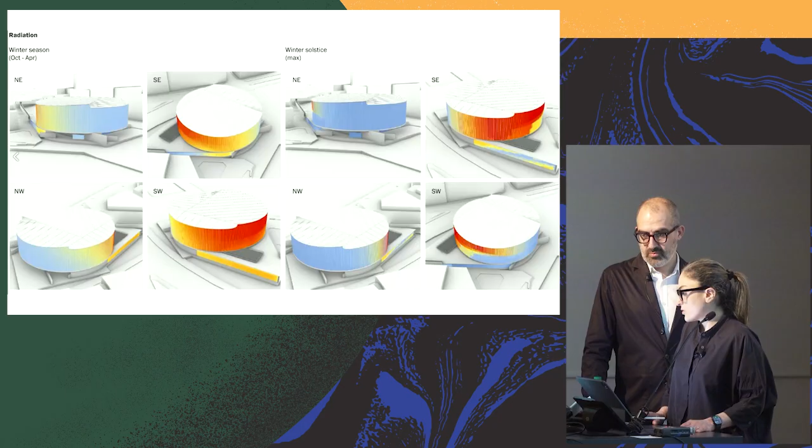So we did a lot of sun studies, like winter solstice and all of that. In the end, the museum became a series of rooms with different climate conditions, from highly controlled galleries and back of house, cafe and gift shop, to extended natural ventilation - we called it - in the greenhouses or winter gardens, and then outdoor spaces: a climatically flexible museum fitting for a 21st century museum.

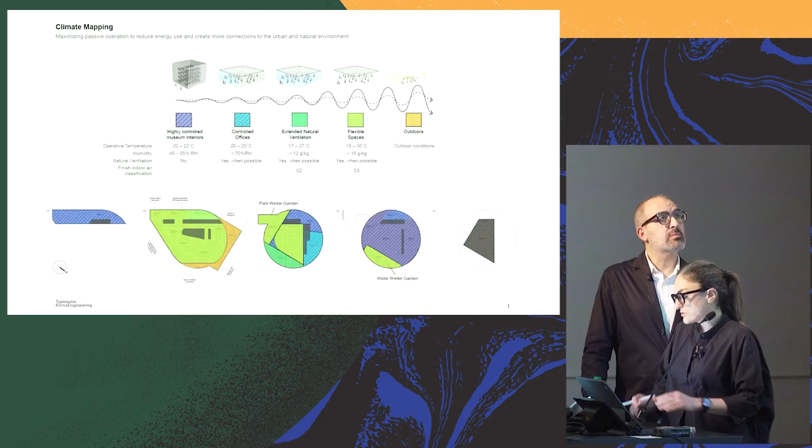Transsolar is great, just throwing so many great ideas about how buildings can function ecologically and how potentially all of those sustainable strategies can exist. As we were talking about the greenhouse, gradually there was a transition from just having two greenhouses in the building to a whole museum based on that, which came from the conversation. These are their studies, which are quite nice.

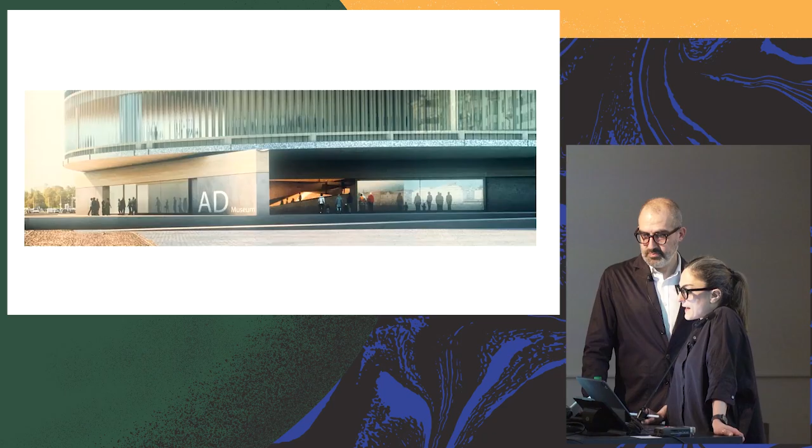And the slow transition from outside in, where the urban threshold makes way for the city life to breathe into the museum. And some of Nima's favorite moments here, mass timber beam sitting on concrete wall, and I'm sure you love the fact that the cylinder barely touches the ground.

Two winter gardens were designed inside of this museum. One of them you see here to the east of the project, and there was another one that I will show to the south side, and each of them had different ecology, and both generate solar gain for passive heating in the museum.

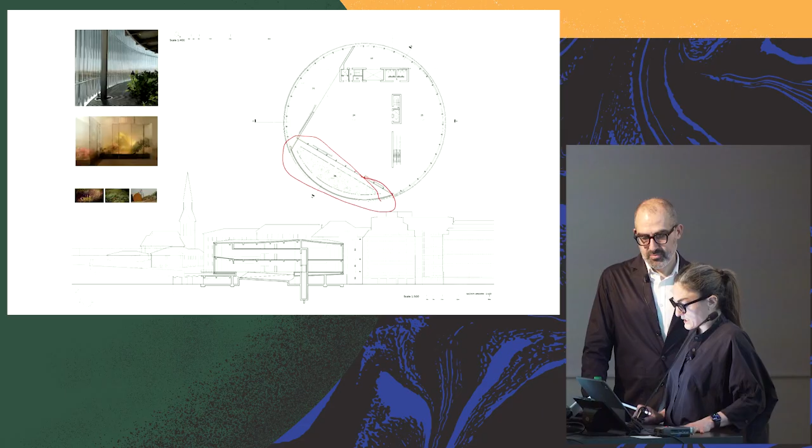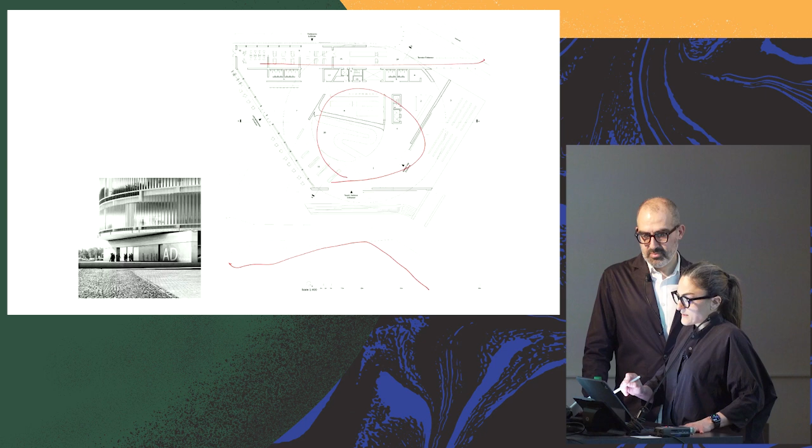Here you see South Harbor, and the lobby, the back of the house, and this is a pedestrian ramp in the center that folds down and connects the upper floor to the entry and even the harbor's edge.

And the exhibition spaces are these open spaces filled with objects curated, and the overlap between the climate comfort of plants and humans and the curation of the objects.

Here you see one of the greenhouses right there in the back, and Hejduk's, that's your footprint. Yes. One of the great jurors, they had multiple jurors, one of them was great, and her work had a relationship to Hejduk. We thought if we put this, we'd have a better chance. Here you see the southern greenhouse right there, and you can see the proximity that it has with the exhibition spaces within the museum.

This was made possible with that carefully curated control that Transsolar is famous for.

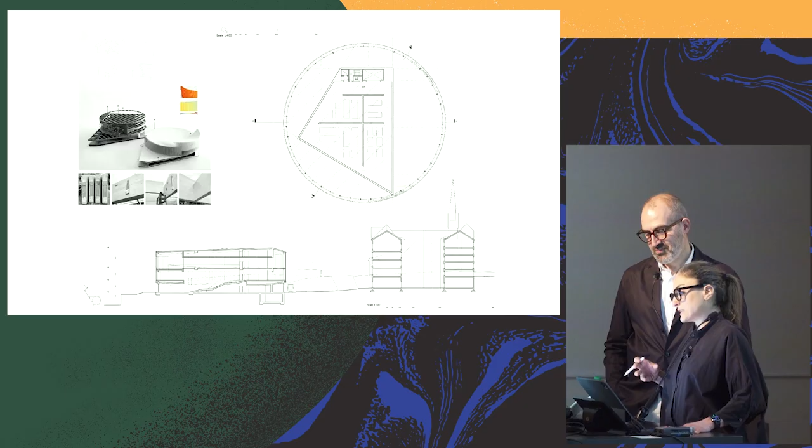The structure is a hybrid system of concrete foundations and a service core supporting a mass timber structure of glulam beams and deep wood girders sitting on shear walls on the edge of different rooms and spaces. I'm sure you would have drawn lines on these, but I'm not going to.

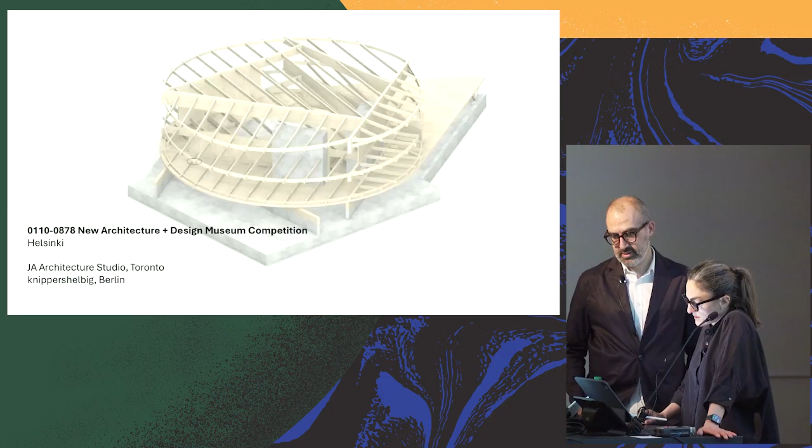We worked with Knippers Helbig, which Nima taught with at the Cooper Union, and they're amazing, based in Berlin, for the structure. From them we learned that mass timber is a careful balance between the amount of steel and mass timber and the type of connections, which can offer new and exciting possibilities.

Here, the connection that we propose can be disassembled, which means that the museum at some time can be disassembled and moved while the footprint remains.

Here you see the muted icon of the project in the context of South Harbor. The purity of the translucent cylinder on top, and the reveal of the internal life, winter garden, people and objects, and the gentle cut on the roof right there, if you can see it, that registers the sitedness of the project on the ground.

In the end, the project was an exercise in how to imagine a range of ecologies and rituals inside of a museum, and how to structure a building's future adaptation and perhaps even its absence.